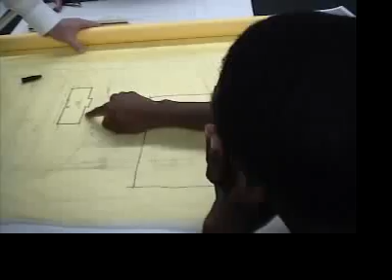We're talking about options, and this is our first pro and con. If we're thinking of having evening programs and so forth, we don't want to have to keep the building open for the public. If it's over here, you don't even have to move the parking lot because they can just come down and park right here and walk straight to the building if you don't want to connect it to the school. By moving it way over here, with no parking lot, they're going to have to walk all the way across. They have libraries, I see what you're saying, but they don't have a gym space.

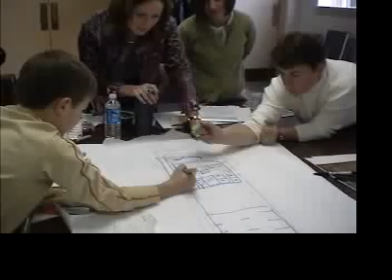So if you pull the admin up this way a little bit and bring the media center back this way, I mean, I think the way the land is shaped, it makes more sense to bring the wings out sideways somehow than back. Well, what made me think about that was you said there could be parking up here, and so how do those two relate? How does the staff parking coming in from there relate to the drop-off?

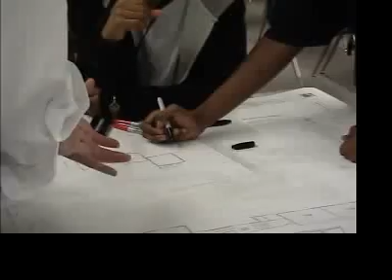Maybe like a little cut hall here, or that whole combination public-private. Somebody from running up, plus the steps are there too, so you can go down the steps. Right, so main entry can come in probably this way, then you have like a sidewalk, and then over here, like the bus, where the buses come over here. So that, I was waiting for somebody to say it. You did it, excellent, excellent job.

You would have this space for the playground, they have a really wide one. And then in there you want to put common, two classrooms, and now you have two entrances to the building. Right, well you will always, but they're just going to... Natural light, like you've been to the Galleria Mall, how you look up and see all that natural light, and if all that light's to the left or right down into the library, the reading area.

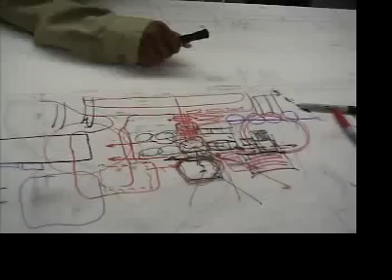All right, so where's the gymnasium? You guys figured it out yet? Back here, back, yeah. There's an office section out here with a view, windows from here to the here, office should have the view of the entryway, absolutely. And those straight see-through windows can just see everything inside and outside as well, so they can know who's coming in. Yeah, I agree.

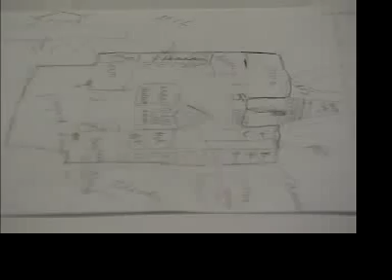I'm just, in my position, passionate about being up in front, being able to see and be part of that entry and dismissal. It's monitoring, I'm always watching who's coming in, are they parents, are they strangers, do they have...

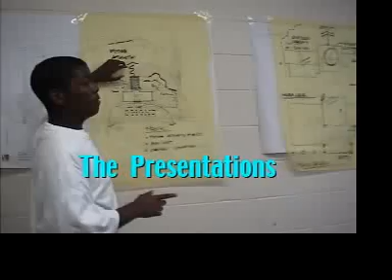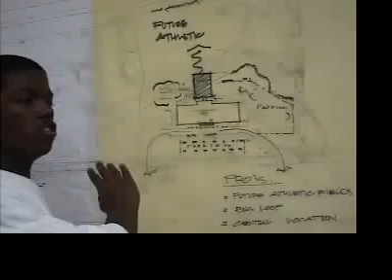We put our gym in the back of the school because as you can see, we still have our parking space which we can extend to reach the gym so we can have more people come in. It also helps the community by letting them park so they can get into the gym for late night games. And we still have our bus loop wide open so the bus can come in and drop us off right in front of the building.

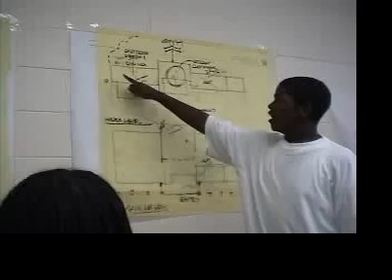We moved our cafeteria over to here so we can build a door for the gym. We decided to bring our library down to here where the main office was and move administration over here so we can put the doors right here for security.

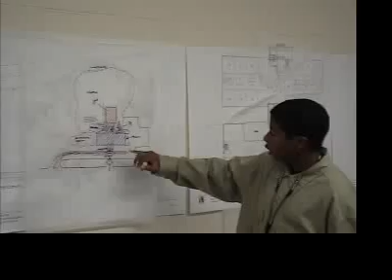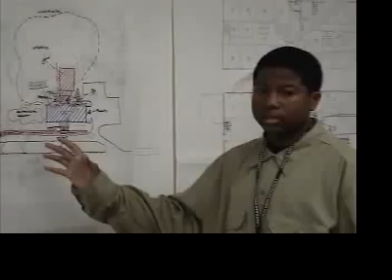One of the things we could do is have the buses parked in the front instead of the parking lot, because during the winter when it gets icy, trying to make that loop in the parking lot is not a good idea. We have the staircase that's crisscrossing, and it's not really having a benefit, so what we're going to do is split the two staircases in half, and we're going to have a security desk in the front.

Building design, I'm going to give you the overview, and then Emily's going to tell you the specifics. We have two entrances, we have our main plaza up front where you have the bus drop-off and the parent car drop-off, and then we have our pods.

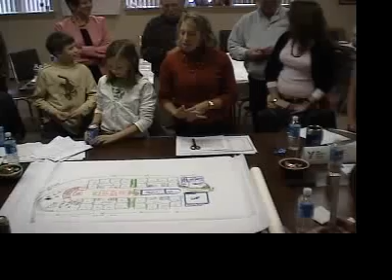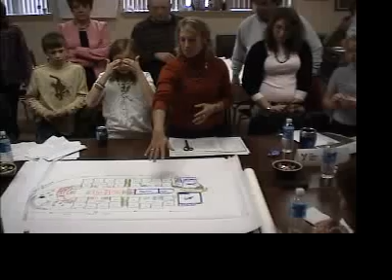On our original design, they were circles, but we're now going with squovals, which are square ovals and so forth. Bending the rules of geometry. Yes we are. In each of our pods we have 6 classrooms. The center part of our building has kind of an open market feel, where you have an oval pathway around the building, and our media center and special classrooms are staying in the center, and then we have a southern plaza that will lead out onto the playground.

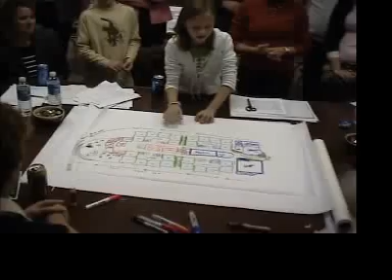Want to tell them about some of the other stuff? In the back entrance, we put an atrium, and there's a waterfall there with a bunch of plants. And then in between the 2 pods, there's a courtyard, so these classrooms have windows to look into the courtyards. And we kind of made cool shapes in the classrooms just to make cool shapes.

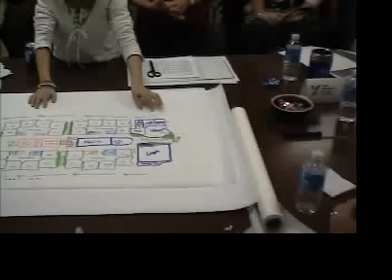So it's not just squares, and you can sit. We made it the shape so you can sit in the corner and read because it's raised to sit on. I like the courtyards as well, because you can actually, I talked to Emily about an environmental garden, so if you look at the state standards for science and everything, that can actually become a learning environment. I like the squovals.

Can you point to a squoval? This is, see, it's kind of not really squared, we kind of ovaled it off a little bit. So what, squircles? Squovals. Podular squoval. Podular squovals.